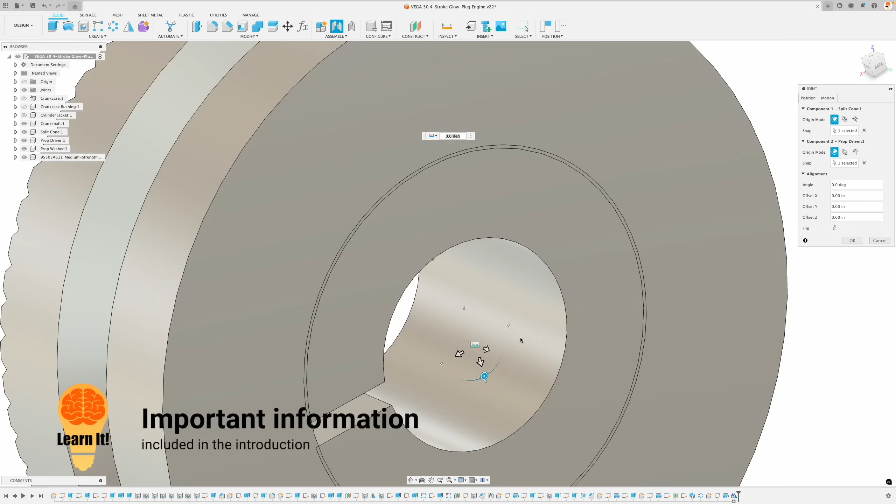In this special series of tutorials for intermediate and advanced CAD users, we will create a fully functioning 4-stroke RC engine. You will model and insert around 50 components to complete this assembly, join them together using correct motion and limits, and then finish it off with a professional render.

To get started with this series of tutorials, we just need to address a couple brief items. First of all, this whole drawing package is set in first angle projection. If you don't know what that means, I will post a link to a tutorial at the top right of the screen. Hope you check it out so that you can understand how to properly model this entire assembly.

Next, if you are a beginner user and you think that you can get through this set of tutorials, that is great. However, we are going to go tremendously faster than the beginners tutorials because it's expected that you will have the foundation already established of all the technical terms and everything that we'll discuss, and be able to work out many of your own problems.

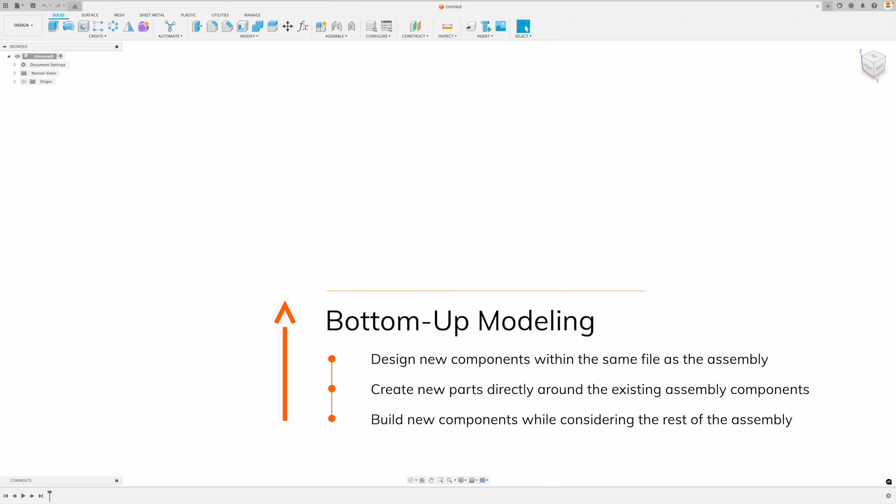The last thing we need to explain is this: we are going to approach this entire project using what's called top-down modeling. Within traditional design, bottom-up modeling is used. That's where you create a component as an individual file, and then you take all those components, all those individual files, and import them into one assembly file. That has advantages and disadvantages.

We're going to do the top-down modeling approach, where we create all of the components within our one file, which helps us do what's called in-context design and work with items we've already created quite easily. If you're looking at a bottom-up modeling approach and trying to figure out what that means, please check out our minifigure series, where we use solely bottom-up modeling to create a complex assembly.

So without further ado, let's get into it. First thing we're going to do is save our file as usual, and we're going to call this the Vega 30 4-stroke RC engine, and save.

Next, we're going to create our components. On sheet 1.1, we can see that this is the crankcase. However, if we look closely, it's not just the crankcase as one component, but there's actually a stock Oilite bushing press fit. So we're going to create an assembly here. We do that by right-clicking, new component. We're going to call this our crankcase assembly. Then within our crankcase assembly, we're going to create another component and call this our crankcase body. After we finish the crankcase body, we're going to create the Oilite bushing as well. But make sure that this is active.

Again, just to show you what's happening here, if we click on the top, you can see that we have 2 components created. This is our top level component, or our assembly. As we activate each one, you see our timeline goes down. This is referring to just what's created within this assembly, which we only have one component. Now if we activate this component, our timeline goes down to a fresh start, because everything we create within this component will be retained in the timeline.

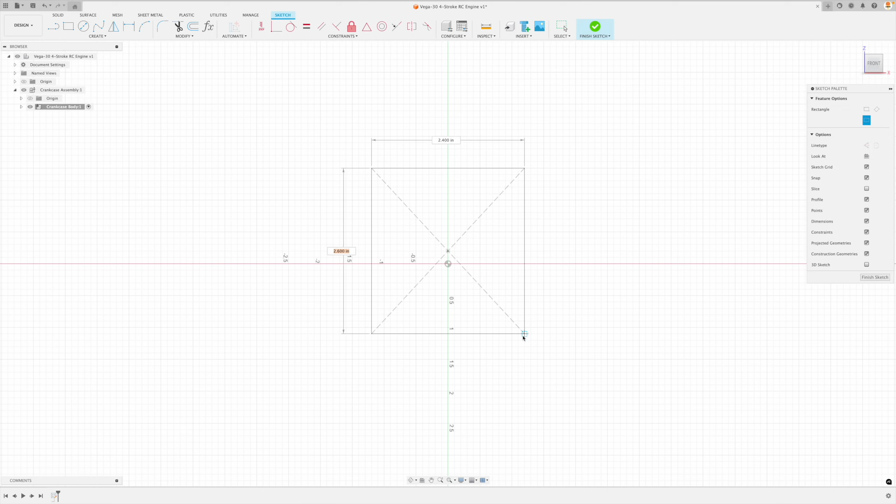Now we're going to create a center point rectangle. Don't create it at your origin because the shape of the rectangle is not symmetric around our origin. So we're going to constrain this horizontally, vertically, and put in our dimensions: 1.34 wide, and we're going to leave that off.

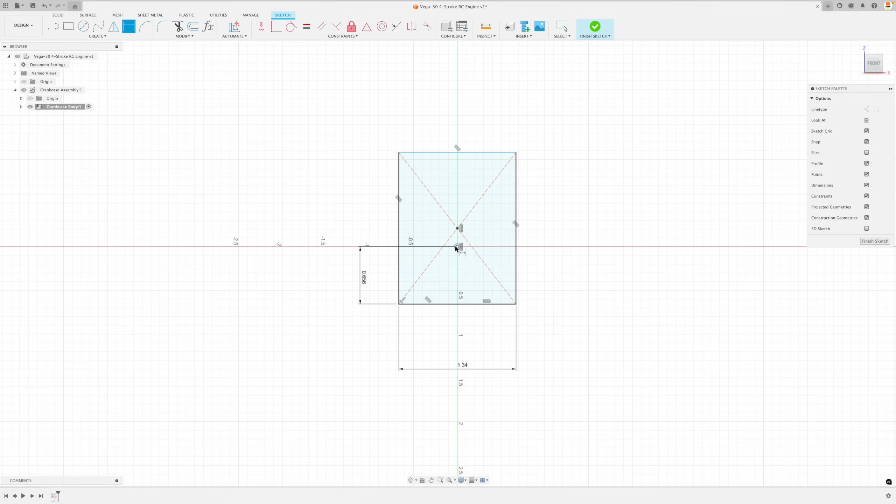We're going to create a dimension from the origin there, just as we see in the drawing. To get into good habits, what I like to do is check off every single dimension that I input as a sketch to make sure I'm not missing anything on my drawing. So I'm going to do that right now.

Excellent, our sketch is fully constrained at this point. I'm just going to go over here and show you our sketch is fully constrained, but I'd also like to create a dimension over here.

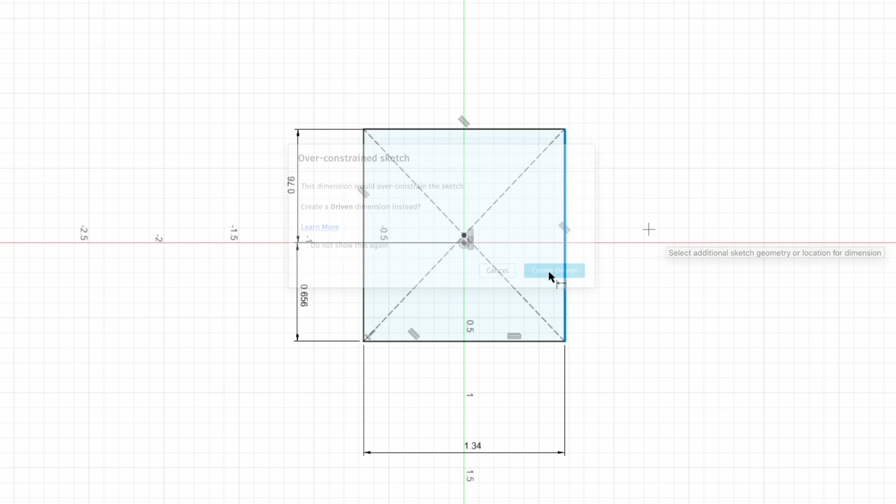This is going to bring up an alarm: over constrained, we want to create a driven dimension. Another name for a driven dimension is a reference dimension. So if we see here 1.416, we look at our drawing and we can confirm the 1.416 dimension is also accurate. So let's finish our sketch.

ISO view, let's extrude this. I'm going to keep the origin at the same spot on the drawing that all the dimensions are based off of. So I'm going to go to two sides here, and we've got one side. This is going to be minus 0.622.

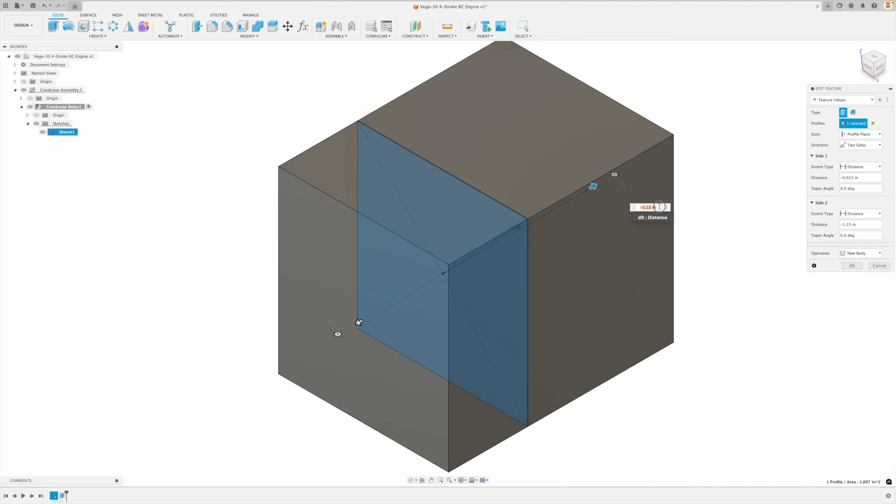Let's go back to our extrude here, and we're going to go the opposite way. We have to do a little math here: minus 1.707 plus 0.622. And now if we go to our top view, I'm just going to reorient that.

Put on our local origin, make it visible. You can see this point is actually in the dead center of our bore where all the dimensions are based off of. That's why I've created my local origin right there.

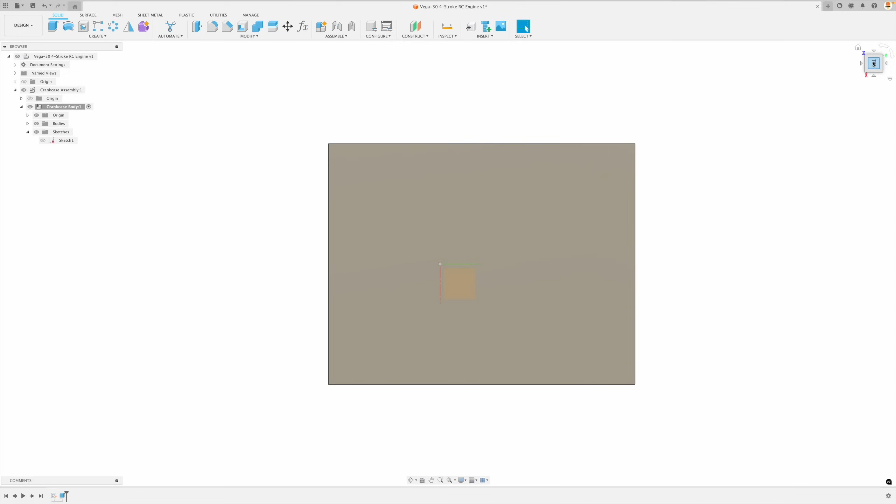I can hide that local origin, and now at this point, let's rename our sketch to get into good habits. Remember, we're going to have to go back and refer to all sorts of different components and assemblies in here, so it's good that we keep this well organized. So let's call this our Crankcase body sketch.

There we go, and this is our primitive. Now it's hidden, so we can go create, and I'm going to create all my sketches first and then create the holes later. So right click, create sketch. Let's create all of the hole points on this top face of our body.

Now, I prefer to use construction lines, reference lines, instead of turning on the origin and using these lines as a point of reference. The reason is if I turn on the origin and create symmetry based off of the origin lines here, it will actually create projected lines, which just makes it look not the best.

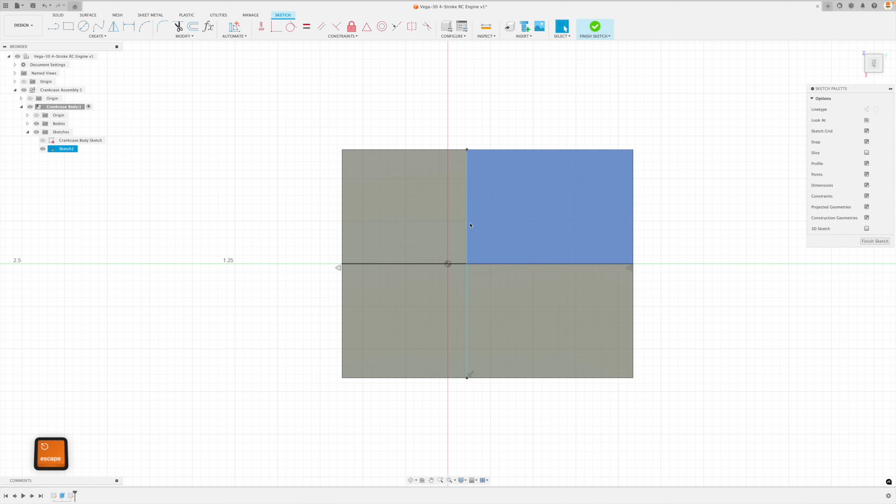So I prefer to create some reference lines here, and I'm just going to go up and down like that, making sure this is vertical, which it's perpendicular. That's fine enough. This is constrained midpoint to midpoint. This I want to coincident constrain to the origin and turn it into a construction line.

Now I'm going to put in all of the different points. I'm going to put one right at the origin. That's not always necessary, but in this instance, I like to force the hole tool to definitely snap to that. You'd be surprised that sometimes it doesn't. You might think it does, but it actually doesn't, and it's off, and your model can be ruined.

So at this point, let's put in all of our other holes, or the center points for our holes, I should say. And we're going to start with symmetry. So pick sketch element, midline, sketch element, symmetry line. And we're going to do that all the way around.

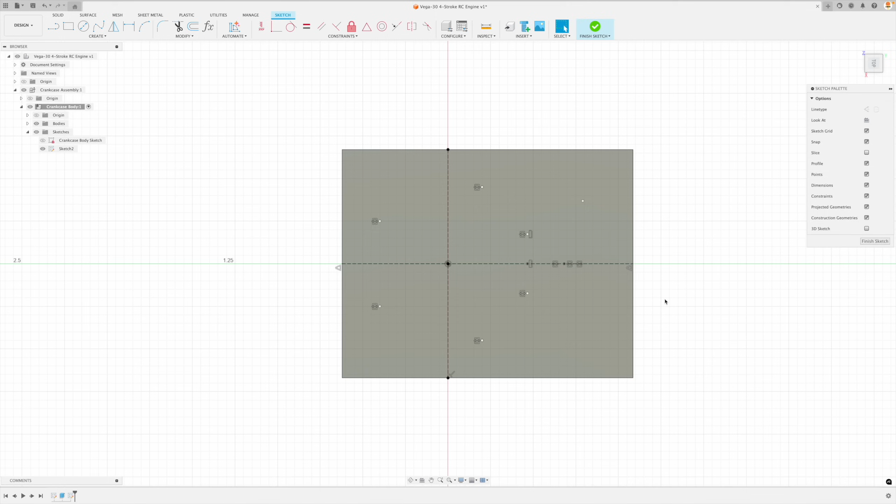This center point right here is going to be constrained vertically to those. So as we move them now, they're all three moving together. And now what I like to do is create all of the dimensions, to the center line, the line of symmetry, or this construction line right here. The reason is if I create a dimension between those two points, you can see we've got an aligned dimension, vertical and horizontal.

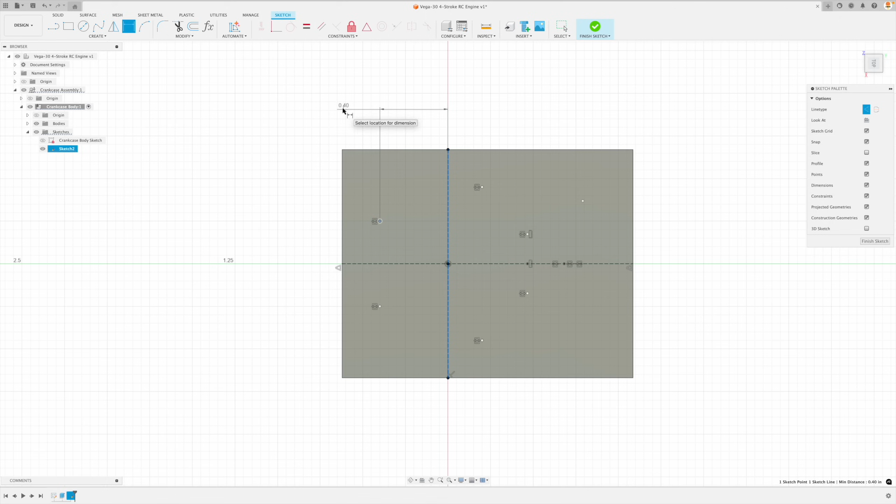However, if I create it between the point and the construction line, it forces it to only do the direction that's perpendicular to our line of reference. So now I can place this right where I need it to, and I'm going to make it exactly the same as what I see on the drawing. So that's 0.423, and then the other direction right here, 0.295, and that will fully constrain them.

Let's keep on going. This one right here, 463, and I believe this direction right there, we're going to call it 226. Very good. Those are fully constrained. Next one, there to there, 0.548. And from there to there it's actually the opposite direction on our drawing. So I'd like to make it exactly the same as I mentioned before.

0.239. And then this center point is actually on the opposite side, on the bottom face of our part. So don't be confused with this. We don't want to create a hole on this top surface. So I could put in 313, but remember, I can just pick a reference and that will create the exact same value, 0.313. If we're ever confused about it, we can just hover our mouse and you can see this is referencing dimension d17. When we single click it, it shows the length down there, 0.313, and obviously it shows the length right there as well.

So we look at our sketch right now and you can see it's not fully constrained. It's still in edit mode. So sometimes ones will see this and they'll say, well, what is missing? What feature or what sketch object have I not constrained? Well, we have to look really closely. What is the odd one out? And I see it right here. There we go. This point right here is not constrained. So we have to put that in. And this is at the top, 0.756.

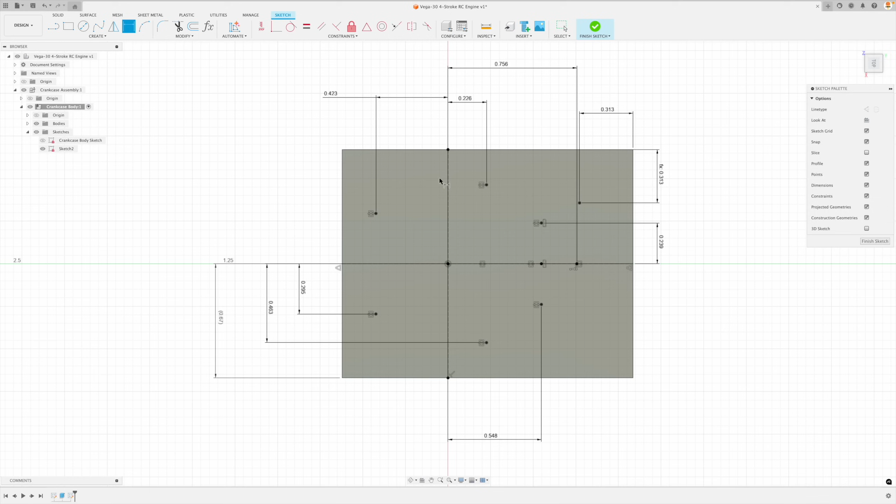Now you can also see there's a couple reference dimensions here as well. And one, in fact, is right here. What do you think when I click? Is it going to say that it's over constrained? Yes, but we still want to create a driven dimension. And this is to verify, just as we see in our drawing, that that dimension is correct. We have another example of that right here. So if we pick that, that's got to be 622. And that is spot on as well.

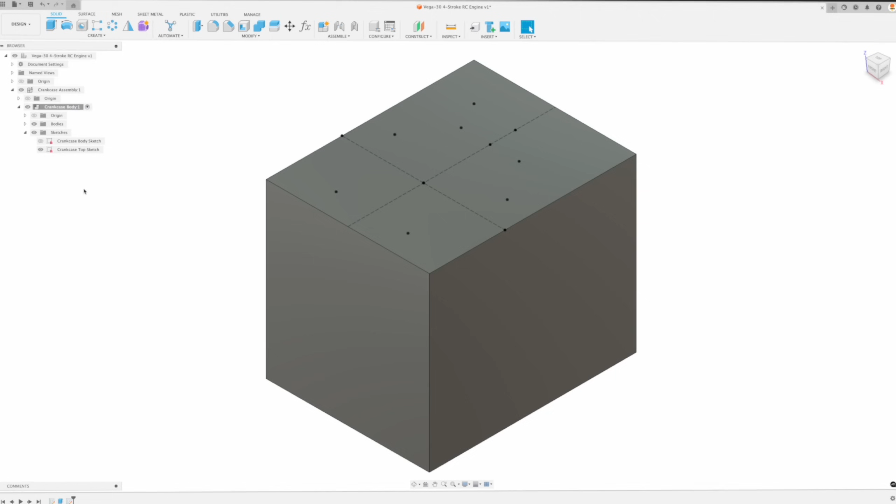So let's go finish sketch. ISO view, and let's rename this. So I'm just going to copy this here, Control C, Command C on a Mac, and I'm going to say that this is the top sketch. Great, let's keep on going. I'm going to hide that and create another sketch right here. We'll notice that all of these different sketch elements are exactly the same on both sides. Now we could mirror, or we could do a projection, and that's what I'm going to pick, is I'm going to project all of those sketch objects to the other side.

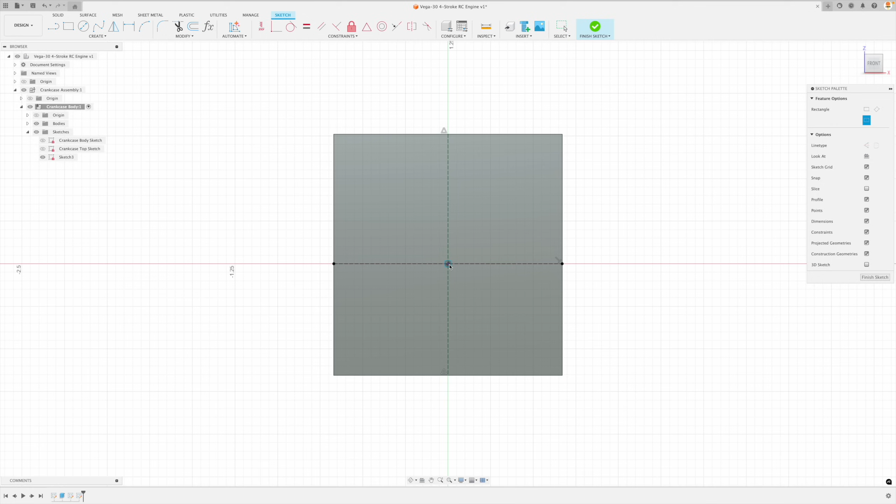But again, I'm going to create a reference line right here. This should snap to the midpoint, no problem, and lock in, but this doesn't. So I'm going to coincident constraint it right there. X construction lines. And now I'm going to put in all of these different points. And I'm going to show you a very easy way of doing this. If we go to center point rectangle and turn it on as a construction line, I'm going to put these endpoints right there and right there.

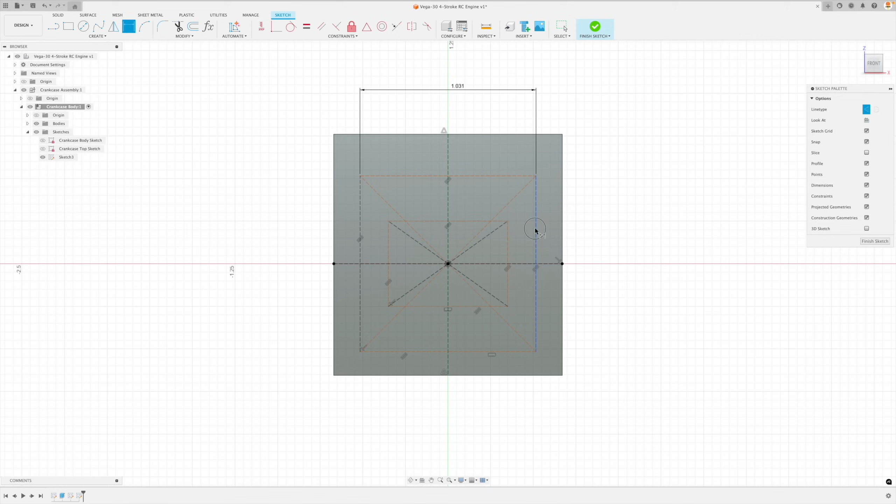Now, what we can do is this puts points in there automatically. These are going to be the center points for those holes. So now all we have to do is put in our dimensions. 1.031, and this side over here as well is 1.031. That locks it all into place. We can do the same thing over here, 0.578. And this side actually has a value from our center point over here, and this is going to be 0.339.

Very good. So this is just one very easy way of creating all of our center points very quickly. Otherwise, we'd have to put in a bunch of symmetry constraints and do all of that, and this is just a much faster way. So let's put in our other ones as well. We're going to do a point right there and right there. This I can make symmetric to each other. There we go. And put in our dimensions.

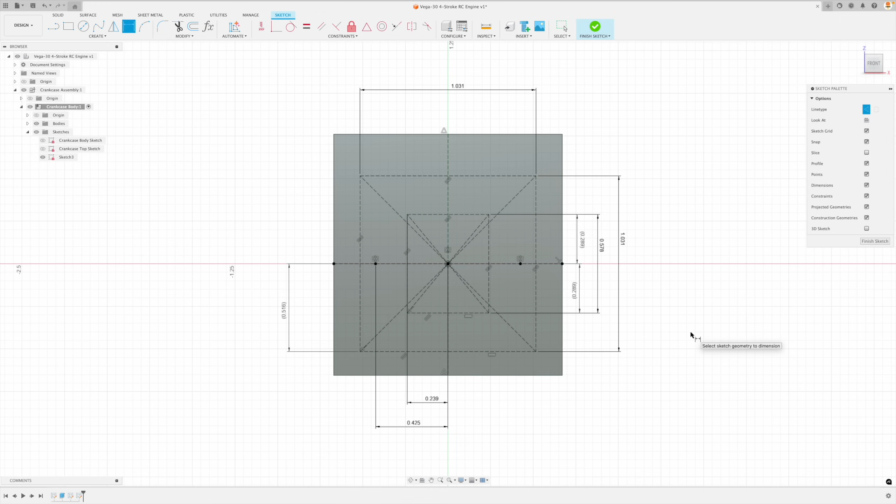Now here we have some other reference dimensions. So I'm going to bring that up. This is going to be driven 0.516. That works out. And then over here as well, from this to the end right there, 289. I'm just going to move this on over to straighten everything out. 289, create driven. Again, this is just to verify that everything on the drawing and in my sketch are the same and everything is accurate. So we're good to go.

Finish sketch. Now remember, I've created these rectangles here just because it's a whole lot easier to do it this way than creating a bunch of constraints. And we have our endpoints. Now what I want to do is we're going to rename this as well. Crankcase front sketch. Great. I'm going to create a sketch on the other side, and I can just pick this face, right click, create sketch.

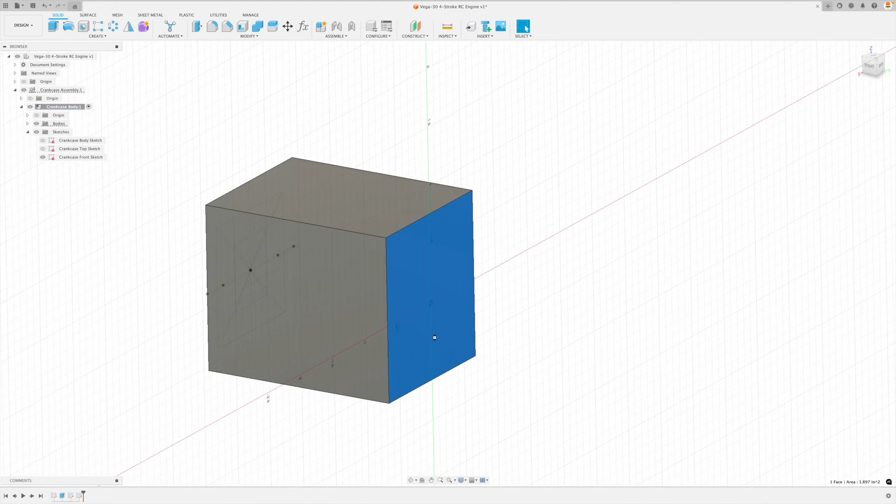And we are going to press P for project, and I'm going to project this center point right there. It's actually already created on the origin, so we could just create a point there, but I'm going to project it, and I'm going to project these center points for the holes right there, and right there. Oh, I picked the wrong one. I picked the line. There we go, and you can see they've projected over. P for project, P for purple. We've got 5 purple points right there, projected points that we can utilize later. So let's go OK for now. We're going to finish that sketch, and you can see those 5 are on there.

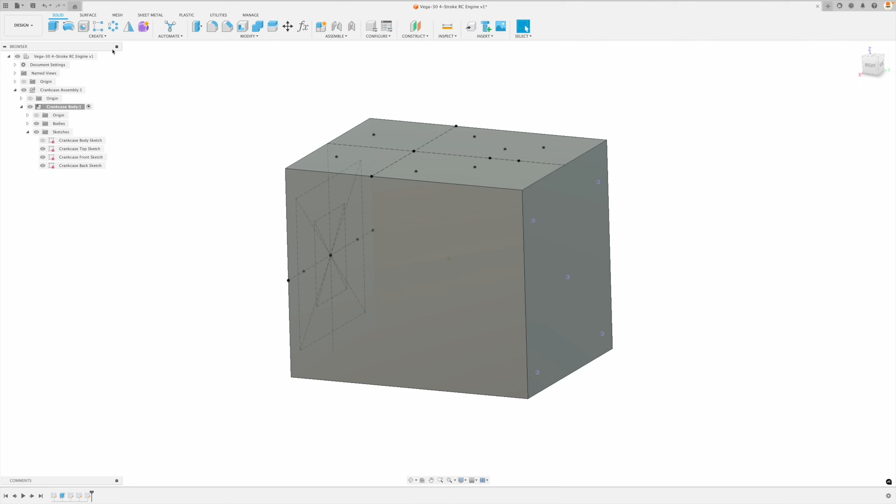We're going to rename this back sketch. And just so it doesn't frustrate anyone, if you want to rename, single click, wait a couple milliseconds, and then click again. Don't click like that, or else you'll go into edit mode, but you're just going to click, wait, click again, you're good to go. Last but not least, we're going to turn the top sketch back on to make it visible. And we're going to create another sketch on the bottom here.

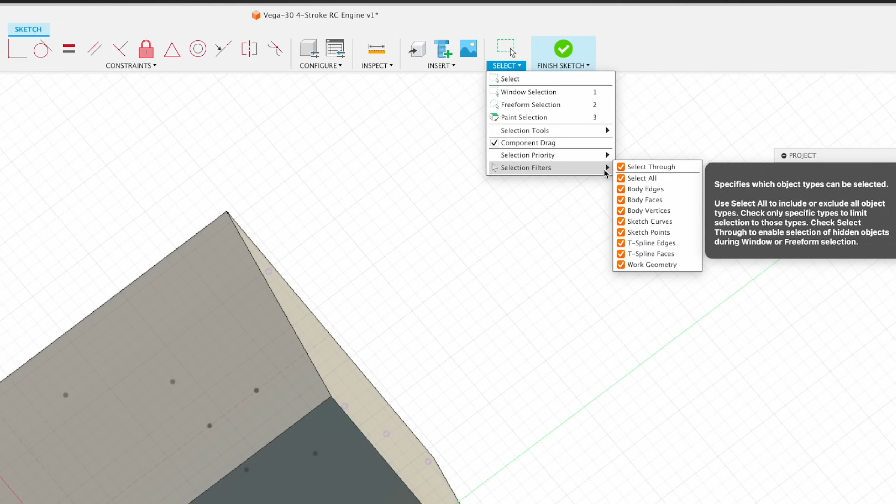And remember, this point over here, there isn't a hole at this location. It's actually on the bottom side. So I'm going to press P for project, and we're going to pick that point. Now, some of you might not be able to do that. If you can't, it's because in your selection filter, select through is not selected. So here, I won't be able to pick those points if select through isn't selected. So pick that, and now I can pick any points that go through our part, and I want to project that center point to the bottom side of my part, or the bottom face, I should say.

So I'm going to copy this. I'm going to make a bottom sketch. There we go. So we've got all the data that we need in order to create our part. We haven't created the chamfers yet because, as you can see, it might get in the way of our sketching. We might have to produce extra projected objects and things like that. And so this is the easiest way. A basic principle is to create our sketches, create our holes or other features, and then at the very end, create our chamfers or fillets.

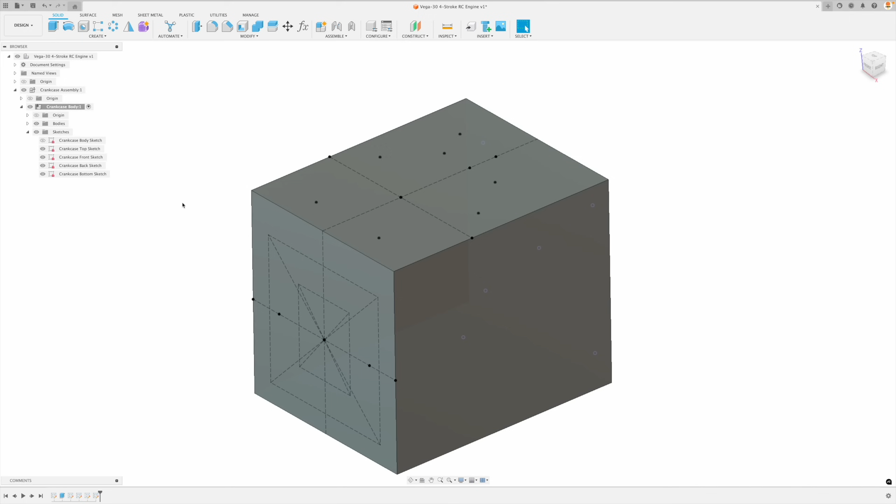Unless the chamfer is very large and it affects how other things are measured, we would create a chamfer earlier in that instance, but in this instance, the chamfers are kind of on their own and there's not really any dimensions based off of them. So that's why we save them to the very end. Now we've got all of our sketches right here. Let's make sure that they're visible, and I can go right into the hole tools.

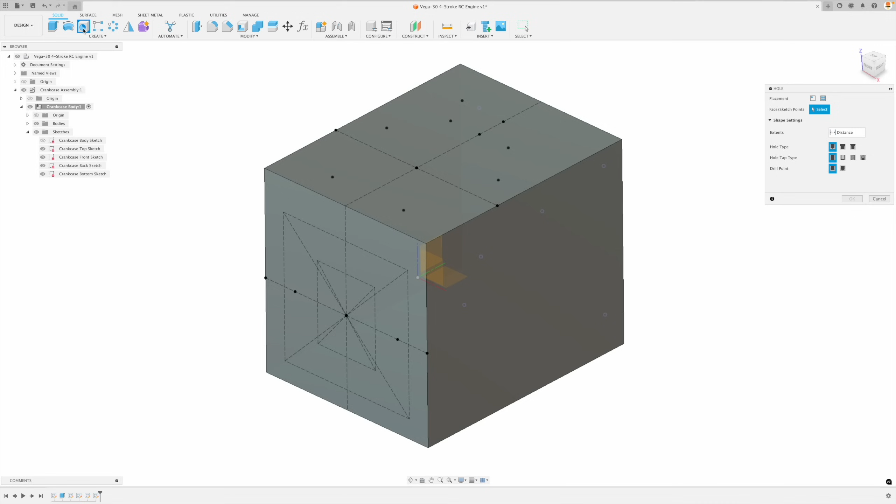Basically what I like to do is start off with the largest hole diameters and move to the smallest. This isn't a rule, this is a principle, and I'll show you why. So first, we're going to create the big bore right down the center. Actually, maybe what I'll do is go all the way through. So this bore right here is metric. So for metric, we don't have to calculate this, we just go 12 mm. There we go. We're going to go all the way through. Perfect. It hides that sketch.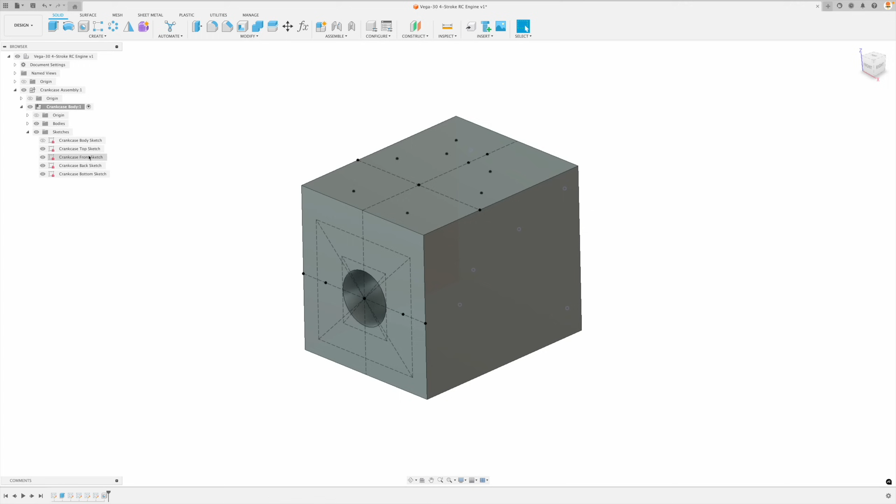We need to bring it back. So next thing, we're going to create the larger bore right down that midpoint. So this is 1.196 and the depth is 0.854. Very good. Let's go OK.

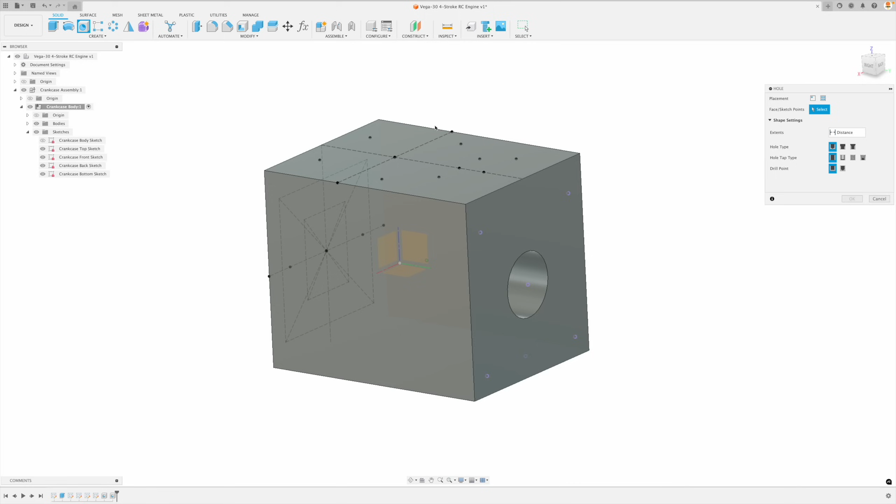Now what we can do is go back to the hole tool, and you'll see that it retains all of the properties that we just created for the other side. So I'd like to pick the center as well. You can see the diameter is exactly the same as what we just did, but on this side, we're only going to go 0.635 deep.

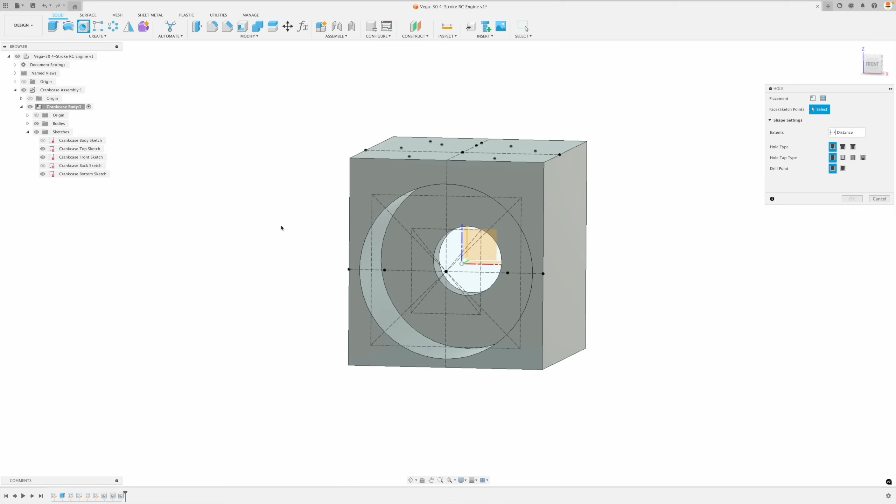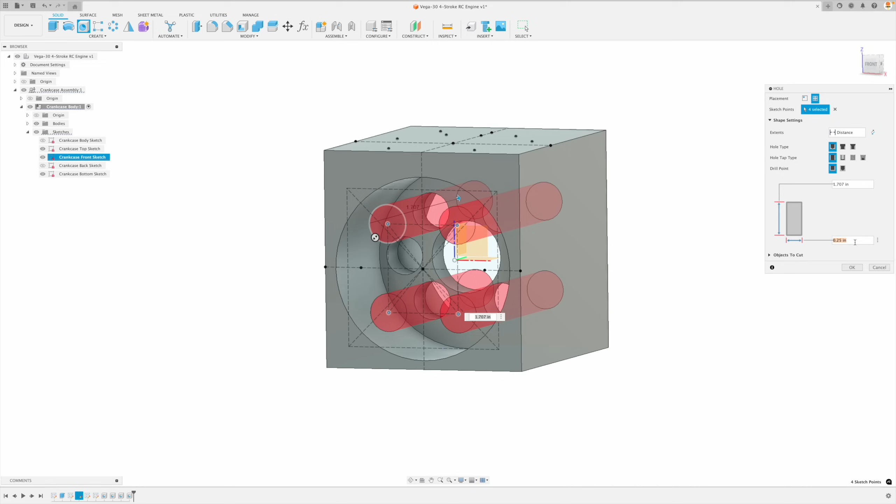There we go. So now we just work all the way through our different hole sizes. So I'm going to go again, largest to smallest is the principle, but it's not a rule. You don't have to do it all the time. I'm going to pick these guys because they are 0.25, a little bit bigger than the rest. These are going to go all the way through. There we go. We're going to create another set of holes here. And these are 0.157, and these also go all the way through.

Next, we can create this bore right here. This is 0.3. We can just press Tab to go to the next element in our dialog window. This is 0.852. Perfect. Let's make that visible again. There we go. And now I'd like to put in all of the tapped holes. So let's do that. This is going to have a drill point tip angle on them. So let's do that. 1, 2, 3, 4.

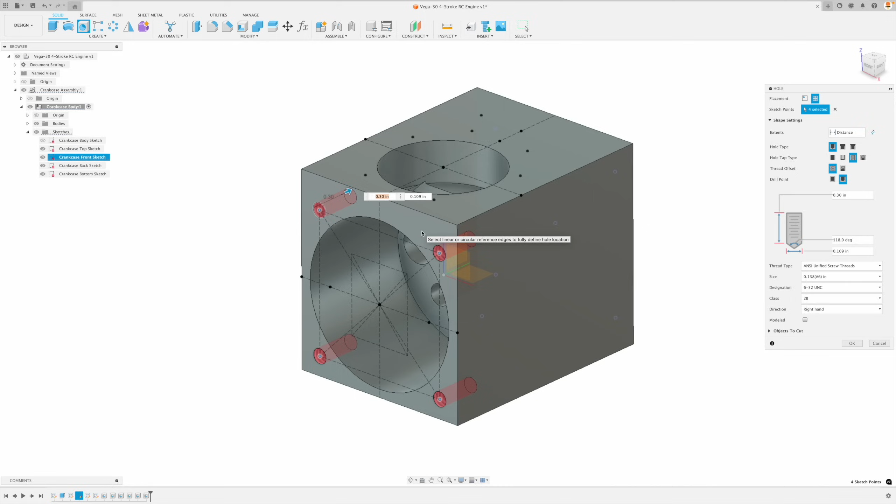I can't pick the other ones as well on other planes or other faces, just the one that I have selected as the first sketch point. We can select everything on that face, but no other faces. So here, this one's going to be a number 5, and this is going to be 0.375 or 3/8 of an inch down. There we go.

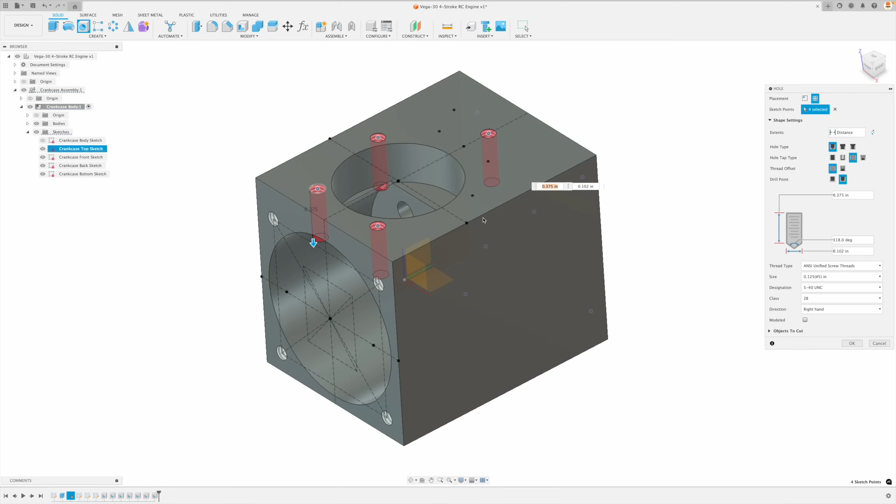That looks good. And now remember, when we select hole, it retains all of that same information. So I'm just going to pick those, and I don't have to do anything. All these are the exact same sizes. So let's go here. 1, 2, 3, 4. Beautiful. Okay, so we've got all the tapped holes right now.

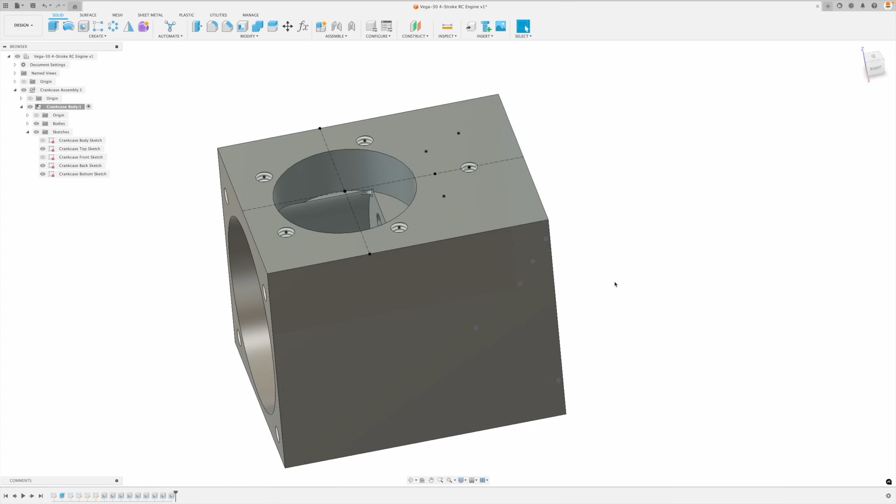Once we're finished with a particular sketch, I can hide it. So the front sketch, there we go. There's nothing more to do there. The top still has a bunch. The back, well, I think I'm done with it, but I think there's actually, oh, you know what? The bores right here for the cams. I still need to put those in. So we'll do that. Well, why don't we do it right now?

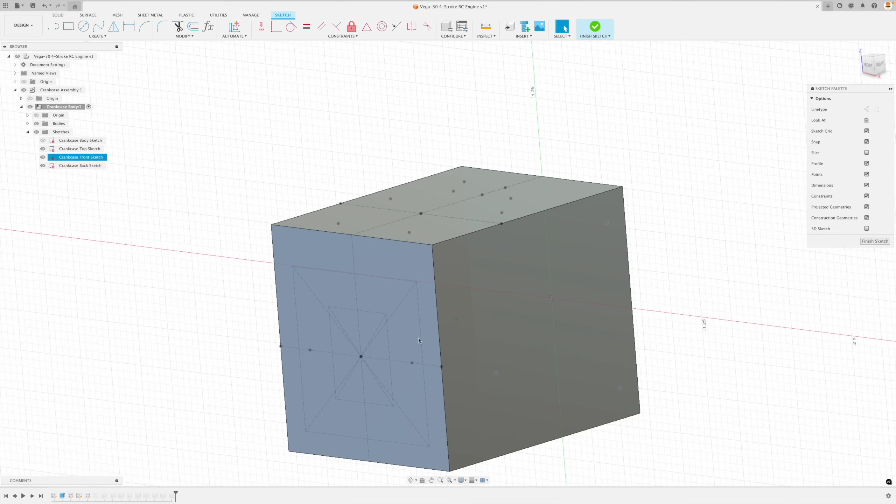So if we go back to the back sketch and edit that, they go in line, the center points are in line with these points right there. So I'll need to project those 1 and 2. Oh, the wrong one. There we go. Perfect. And do those 2 points right there. When I finish, it goes back in time.

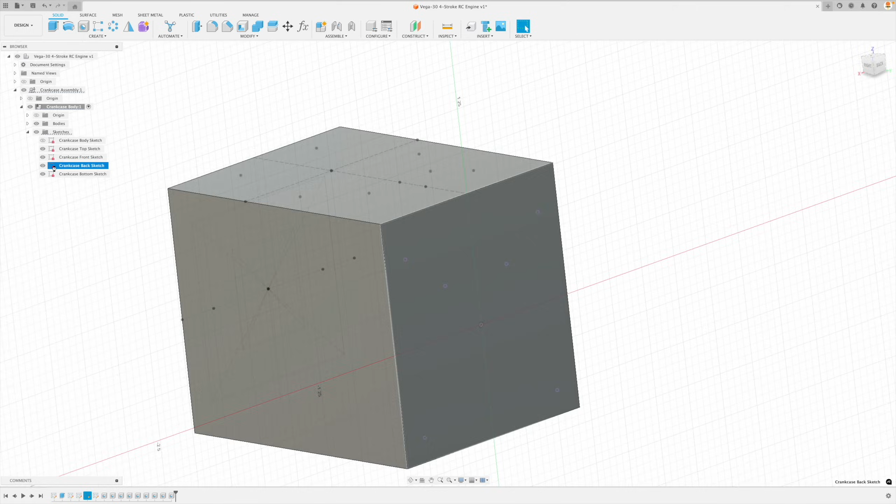Everything is parametric here. So again, when I went back to the back sketch, it goes all the way back in time to when I created that. Everything after or downstream is hidden. So now when we edit it and we go finish, then it jumps all the way back to the end of the stream, to the end of the timeline. And now we can work with those 2 points.

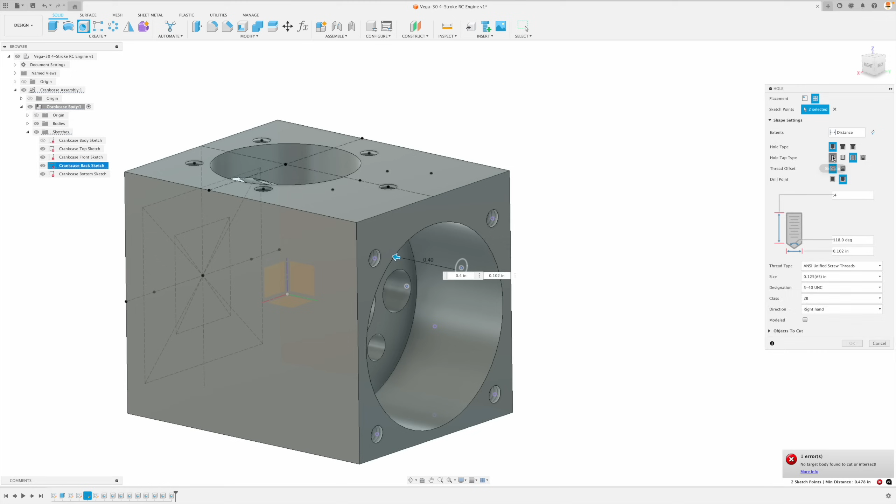So let's create these 2 holes as well. And these are 0.4. This is a simple and a flat, and 0.563 diameter. So just like that, don't forget to put those in, or else our cams won't be able to move properly. Perfect. So our front sketch is now done. Our back sketch is finished. We don't need to use that anymore. And our top we're still working with.

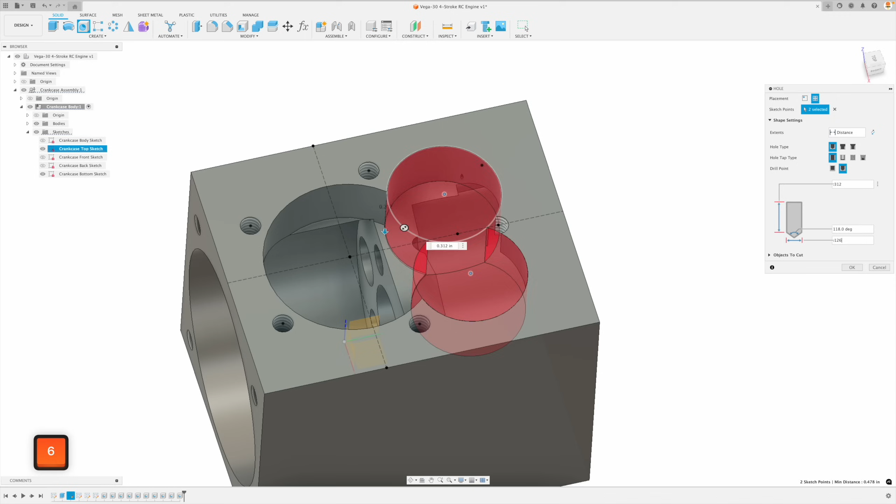So let's go back to our hole tool. I'm going to pick these 2 and insert the information. Depth of 0.312. And our size is 0.156. Hope you've been checking off all these dimensions so that we don't forget anything. Next is our countersunk hole. We're going to go countersink. It's going to be simple.

Now here, it actually doesn't give us a diameter of the countersink. So we can fix this later if anything else on our other components give an indication of how large this needs to be. But I'm going to go 0.262 deep. And you can try this diameter right now. The diameter isn't 0.262. It says the depth is 0.262. And what I can see is there's no notes that indicate this diameter as well.

60 degree is our angle, and our diameter through is 0.094.

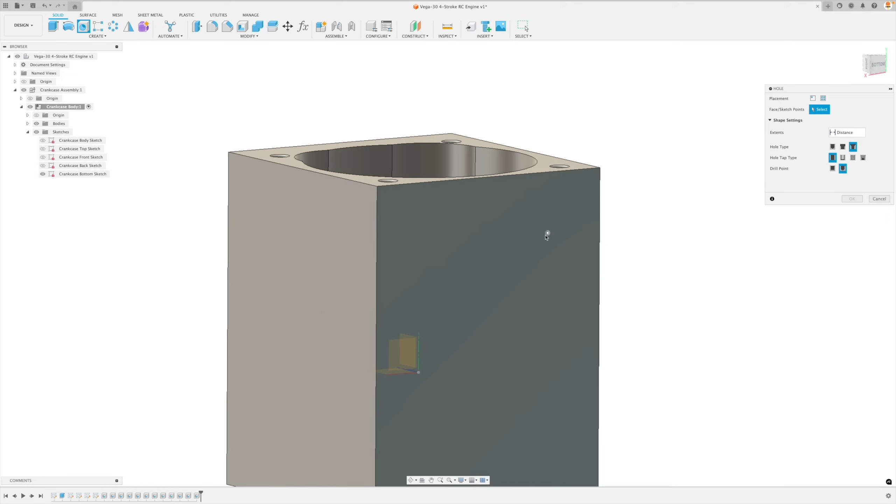Very good. So everything on the top is now done. Remember, this point right here doesn't have a hole on the top face. It's actually on the bottom. So we're going to go over there and we're going to insert this. This is a tapped hole that goes 0.276 and it is a number 6 right there. So I think that's good to go. And that's going to be the fuel inlet at the bottom.

Very, very good. So I think this is looking great. I am now going to put chamfers on these 2 right there, 0.110. Now, have I missed anything? Well, I've been checking off everything on the drawing. And again, I hope you've been doing that. In section AA, there's some other reference dimensions. And so we can double check any of those if we want.

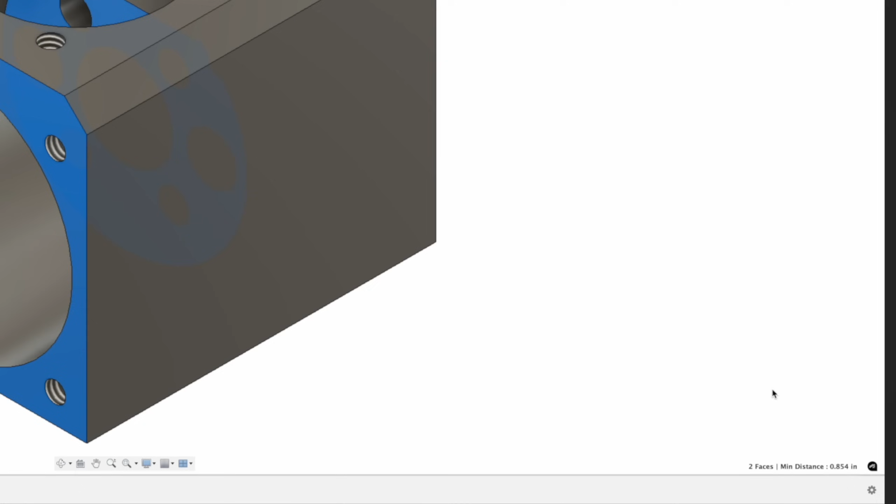Let me just show you something here. If I pick this face and then hold down shift and pick this face, you'll notice that the distance is down at the bottom, 0.854. So we can confirm that that's correct. However, we can't use that method when it comes to holes. If I do that, it shows the minimum distance. I'd actually have to go to inspect, pick the face, and then the hole. Don't pick the diameter, pick the face of the hole. And this will show the distance 0.848, which is true. So you can verify all those dimensions in section AA.

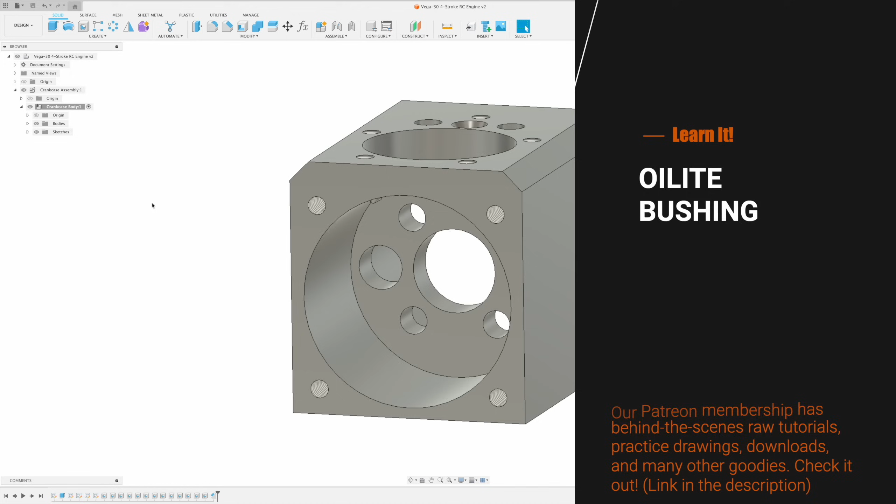But in the meantime, this is looking great. All of our sketches have been renamed. We're going to hide that. I'm going to save my file. Now what we're going to do is finish the Oilite bushing, and we're going to do this using in-context design. So let's go back to our crankcase assembly, right-click, new component, and we're going to call this our Oilite bushing. In fact, I'm going to call it the Crankcase Oilite bushing, just in case there's other Oilite bushings that we might use. Everything turns transparent, and here we can work with these dimensions without having to change them.

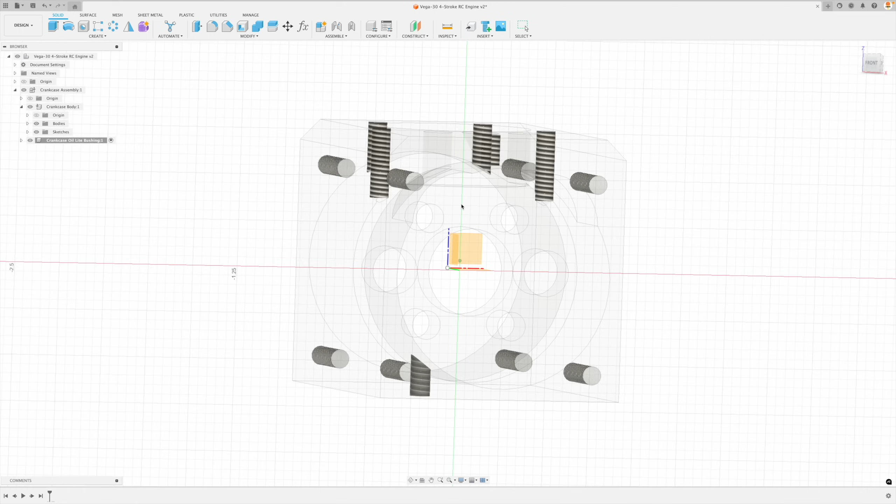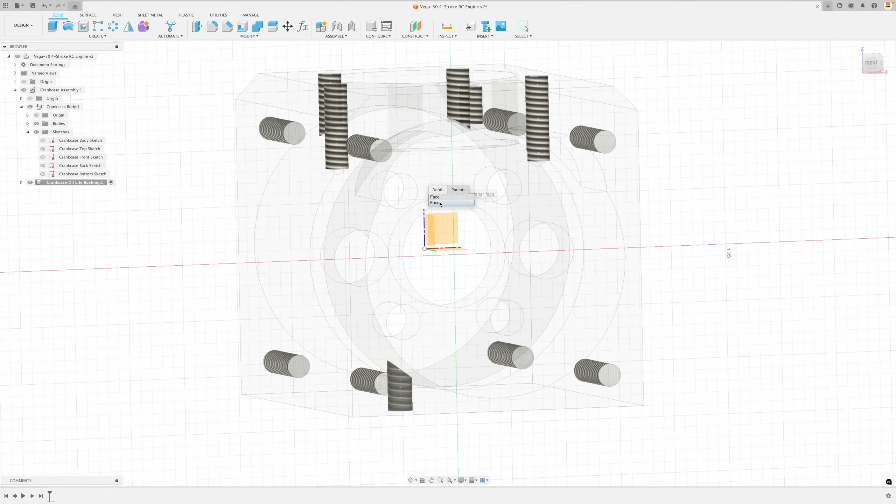So if I go create a sketch and pick this face, we'll be able to inherit all of that geometry. Now, if we haven't hidden the sketches, look what happens. If the front sketch is active, I'd actually be picking this front sketch instead of the face. So I can hide that, make sure it's hidden, and now I can just hover my mouse and I'm confident that it will pick this face right there. We could also long click and we've got both these faces. So anything that's in line in the direction of the mouse cursor, I can pick if I long click, but I want to pick the front face here. You can see there's a difference. It kind of jumps back, and this is the face on the other side of the part. So I'm going to pick this one.

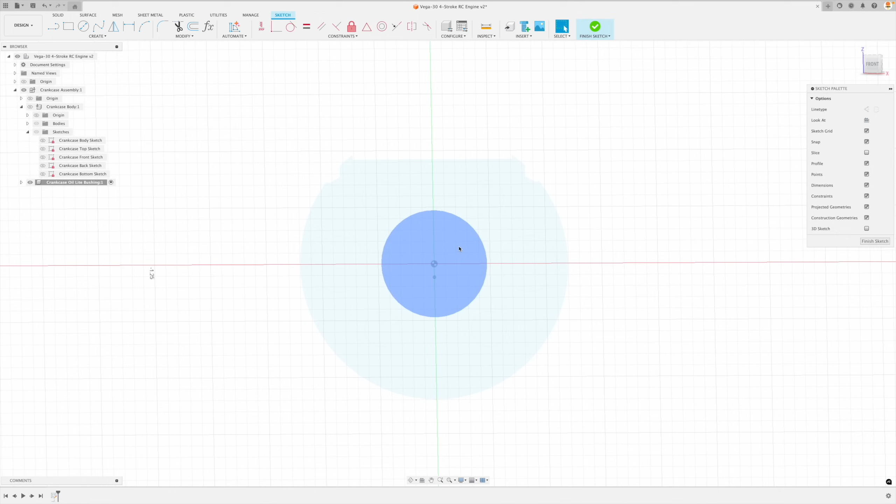It inherits all this geometry. So I can now hide the crankcase body, and you can see all that geometry has been inherited, which we can work with. We want this diameter. We don't want to have to create a new diameter. So in fact, I can go here and I can create the inside diameter, which is 4 mils. And just to verify, I could also click on that, press D for dimension, and create a driven dimension just to verify that I am working with this value right there, which is looking great.

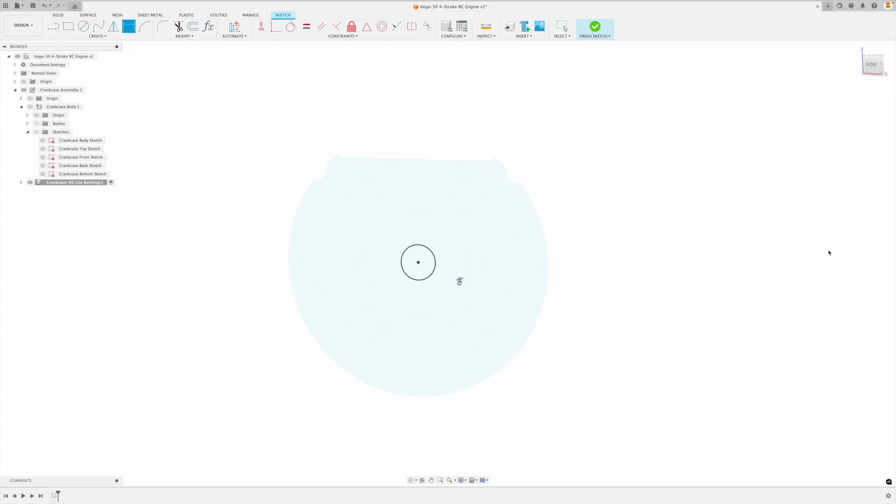Let's finish the sketch. We can extrude. We can go from here, and I'm going to make my crankcase body visible. And here we don't have to do the calculation. We don't have to move this and calculate anything. We can just go to object and pick this face, and it will create the bushing right there.

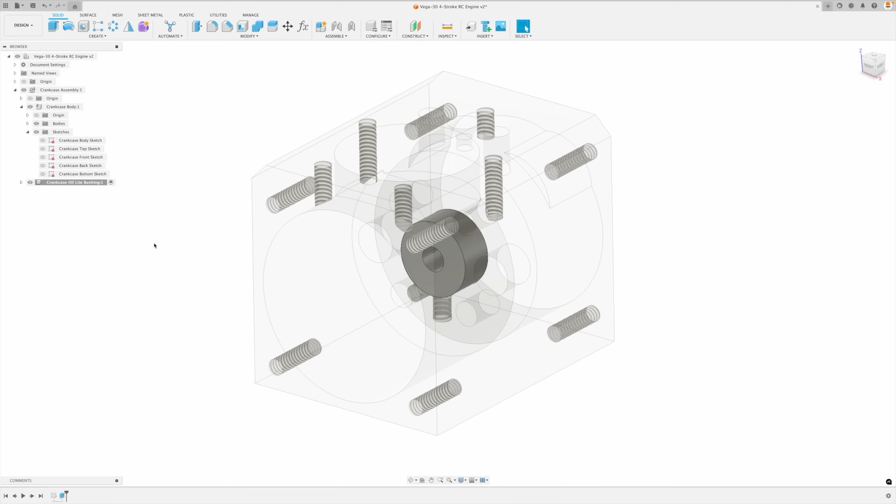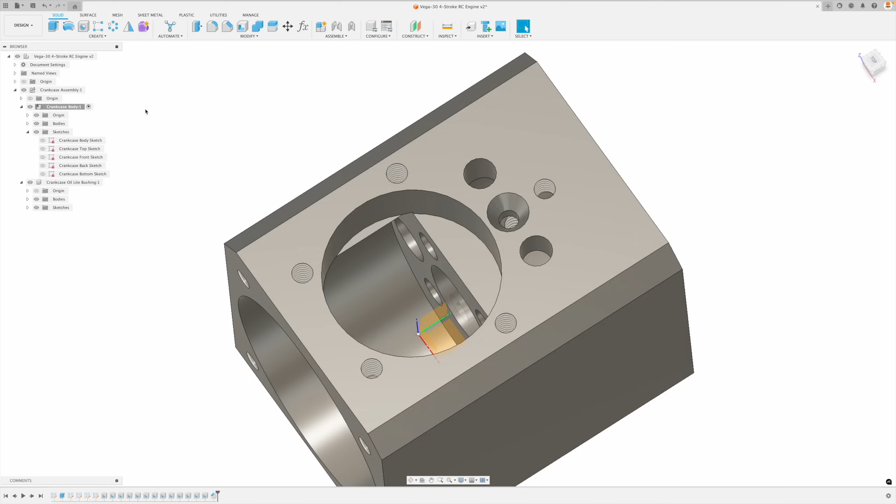So one other thing I just want to teach us, it might be something new, is everything has what's called a local origin. So we've got a global origin, and that is exactly where we've created the crankcase. That won't move because the crankcase is grounded. However, each component has a local origin. For the crankcase body, if I activate that, the local origin is exactly the same spot. But what about the crankcase Oilite bushing? If I activate that, where is the local origin of this? We didn't really care where it was because we did in-context design.

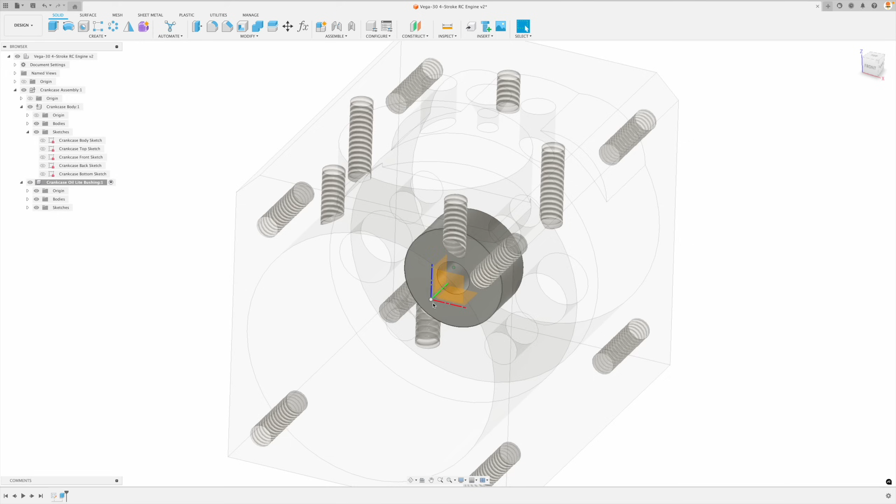So I'm going to make it active, and it's right there as well. If we created this part on its own as an individual component, well, the origin would probably be the center of it or based off of this face. But in this case, we don't really care where it is because we've done an in context design. So now that we've got that, this is looking great.

I'm just going to hide that local origin. We can hide everything else. Let's activate our top level component or assembly. Here, let's just explain the timeline once again. We've got every single thing that we have made all the way down to the crankcase Oilite bushing. If we activate our crankcase assembly, it has all the tools that we've created within this assembly.

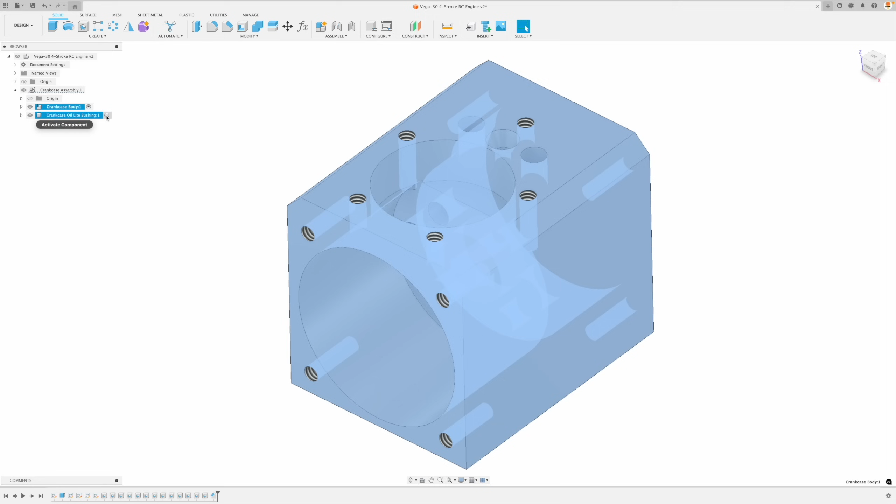If we just do the body, it drops down even further. And if we just activate the bushing, you can see we just have a sketch and an extrude. So this is where we're keeping our workflow nice and tidy, everything nice and labeled. It makes our life designing in Fusion a lot easier. Now we can rename the sketch as well, but since there's only one sketch here, we don't really have to worry about renaming it. So now what else are we going to do before we finish?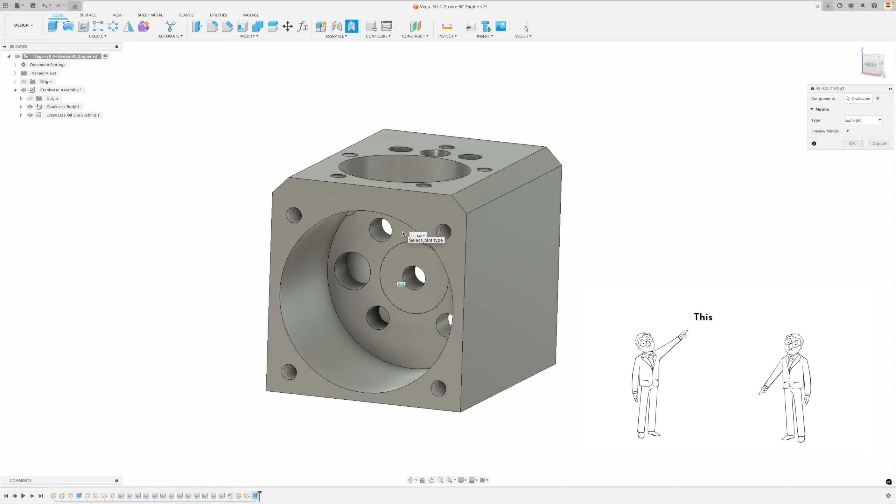So now let's make sure that we join this component, the bushing, to the crankcase. And we're going to go not to joint, but assemble. And we're going to do as built joint. We're going to pick this to that. Always remember this to that. Rigid. Let's go OK. Now for the joint, you can see that it's created it within the crankcase assembly.

We're going to expand that, and I'm going to rename this right away. I'm going to call it bushing to crankcase body. Just like that, we can hide it. Very good. And now let's change the physical material. Why do we change the physical material and not the appearance? Well, the appearance will keep it as the default material. It will just change the look of it. But we want to change everything. We want to measure the mass at the very end. But in order to do that, we need to change a physical material.

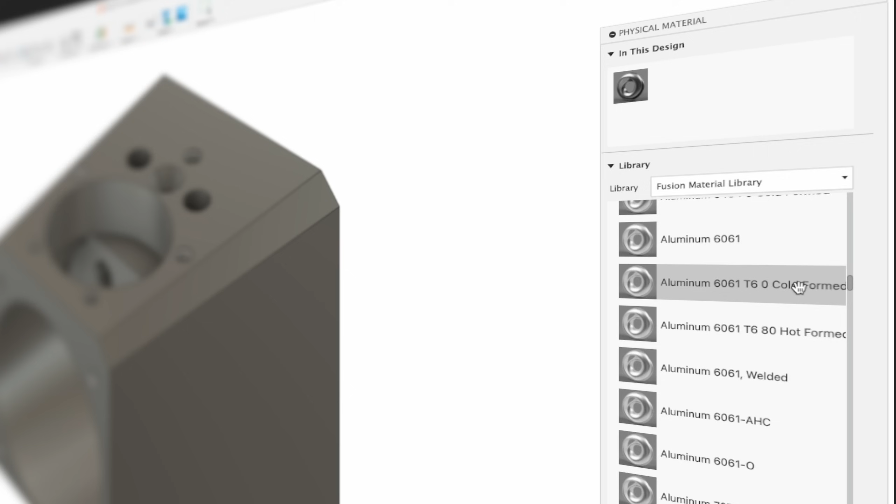So right click, physical material. I have created a list of favorites. But if you don't have a list of favorites, go to Fusion Material Library, expand metal, and you're going to find aluminum 6061. As you can see, there is T6, and this is all on our drawing as well. We have T6 cold formed and hot formed. Which one is it supposed to be? Are there any engineers out there that can guide us? Is it supposed to be cold or hot formed? Let us know. In the meantime, I prefer just to use the 6061 here, and you drag and drop.

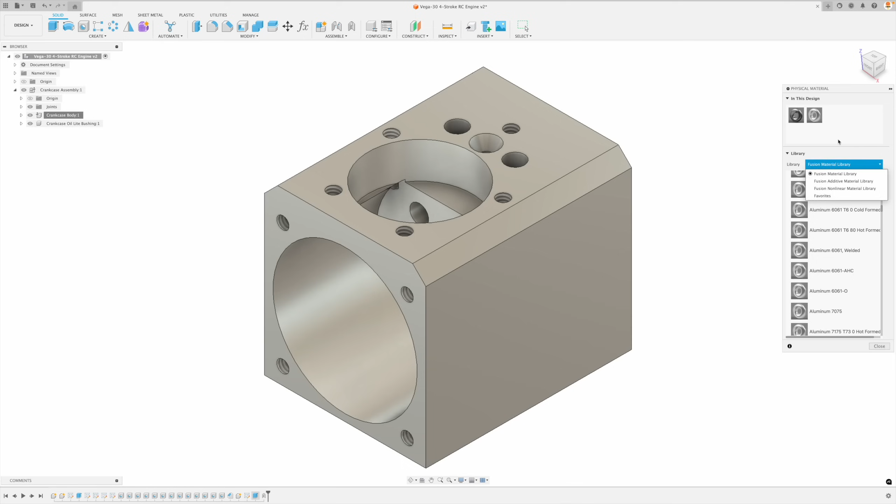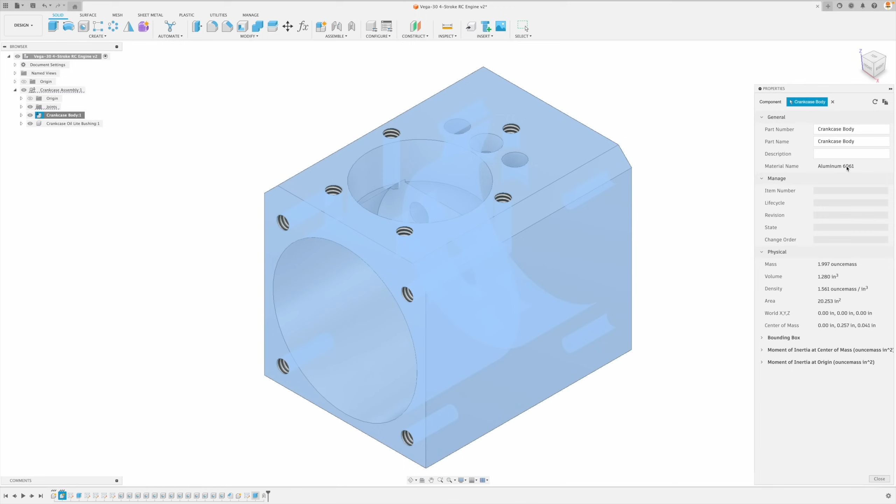Once you have a list in your library of favorites, you can just right click and add to favorites. Once you have them, click on that, and you can see I've got brass, bronze, and aluminum. So I'm going to drag bronze over to the bushing, go close, and we're good to go. And just to show you again, if I right click and go to properties now, this will show us the mass based off of the material, which is aluminum. If it was steel, obviously this would be a lot heavier.

So there we go. This is our first tutorial. Hope you will continue to stick with us. Next tutorial will bring about the cylinder jacket, maybe more, but the cylinder jacket is quite complicated.